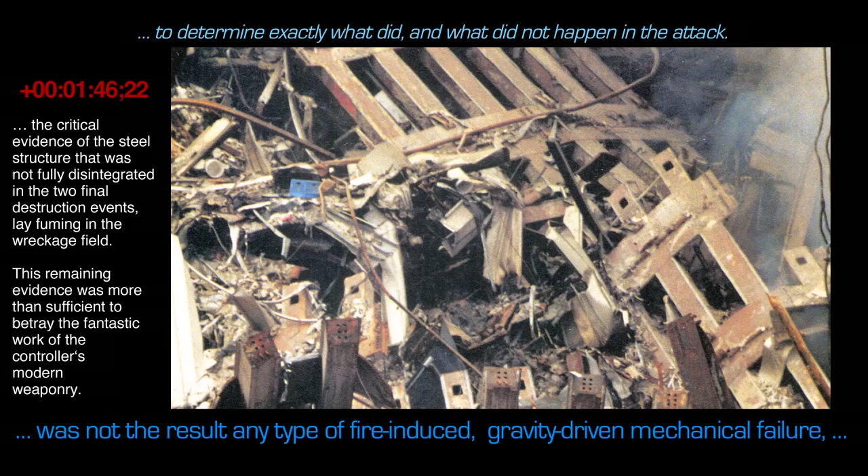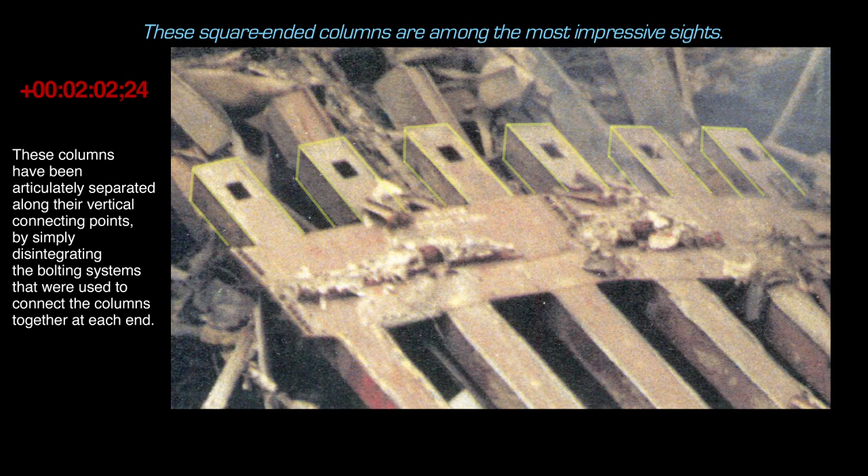It was the combination of the impact load doing great damage to the building, followed by the fire, that caused collapse.

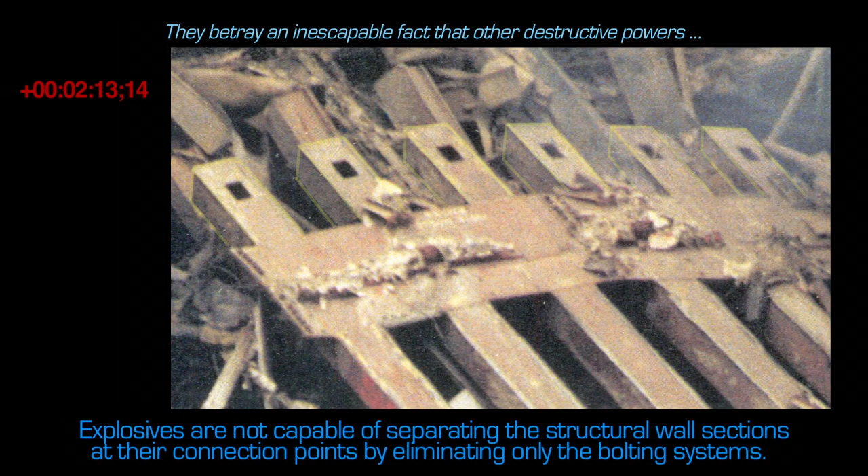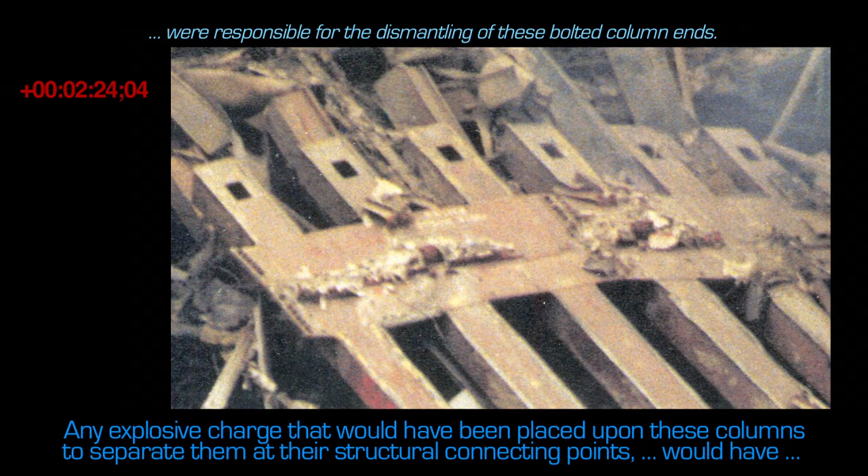What is clear is that this technology must be kept secret at all costs. And so you get this cover-up team saying, for people asking questions, oh, it was thermite, or it was bombs in the building—giving somebody someplace else to go so they quit asking questions.

One of my listeners is wondering, do they use thermite in regular controlled demolitions? It's not commonly used. RDX and HMX are typically used. These explosives have...

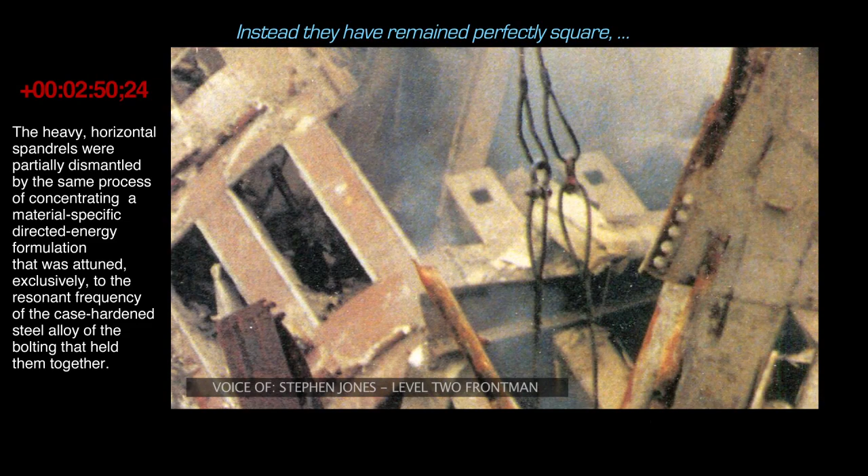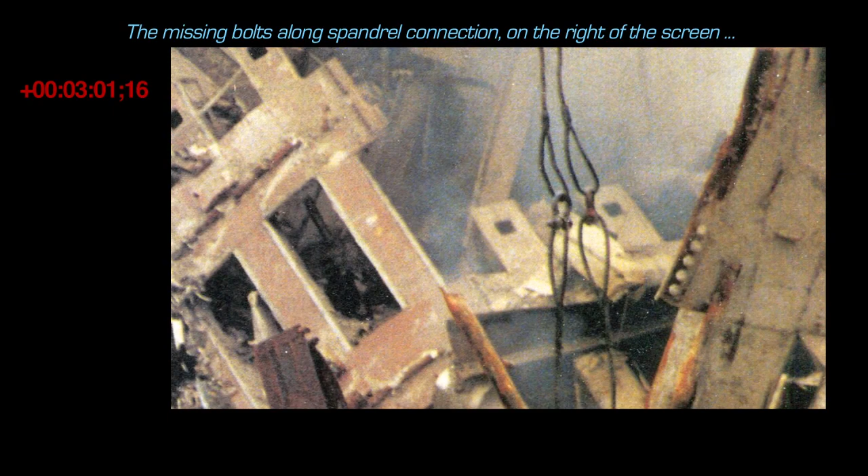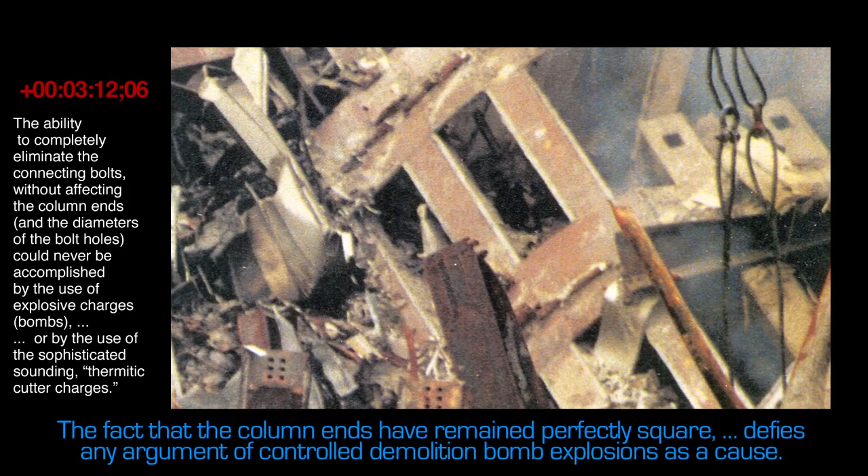Tags—chemicals that tell where the explosive was manufactured. The advantage of thermite is you don't have those tags, but in ordinary demolitions, where you're doing things legally, you don't worry about taggants. You don't care if somebody says, 'Oh, you bought your explosive at company X over here.'

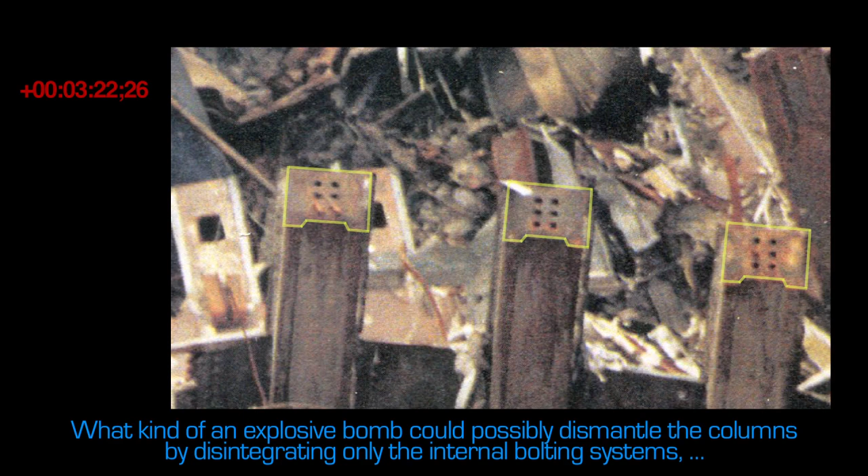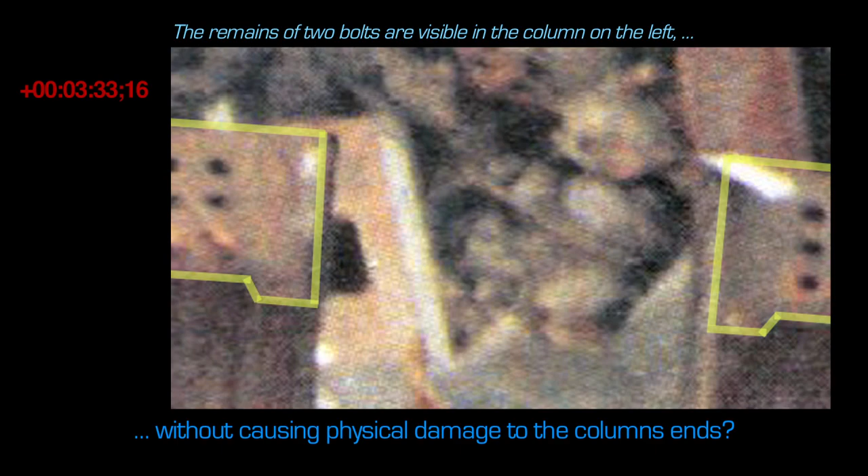Because with thermite in the World Trade Center buildings, someone might have been worried that there would be these tags in the explosive—using thermite gets away from that. It's a very common material, on the other hand, used for melting through steel, not for demolitions.

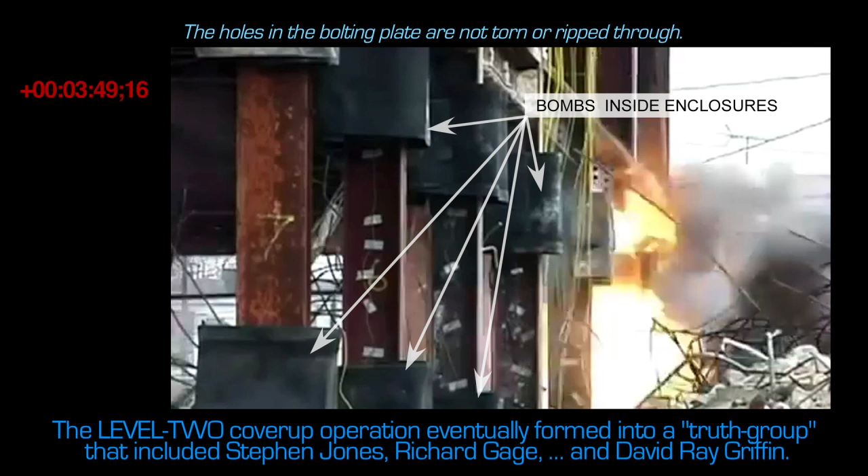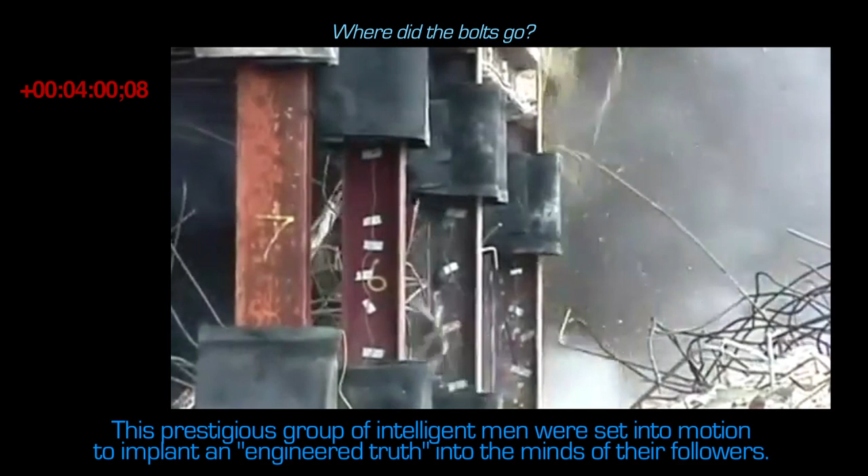Number 5: In controlled demolitions of steel frame buildings, explosives are used to slice the steel columns and beams into pieces. A representative from Controlled Demolition Inc. has said of RDX, one of the commonly used high explosives, that it slices steel like a razor blade through a tomato.

The steel is, moreover, not merely sliced, it is sliced into manageable lengths. As Controlled Demolition Inc. says in its publicity, our system segments steel components into pieces matching the lifting capacity of the available equipment.

Jim Hoffman, after studying various photos of the collapsed site, said that much of the steel seemed to be chopped up into sections that would be easily loaded onto the equipment that was cleaning up ground zero.

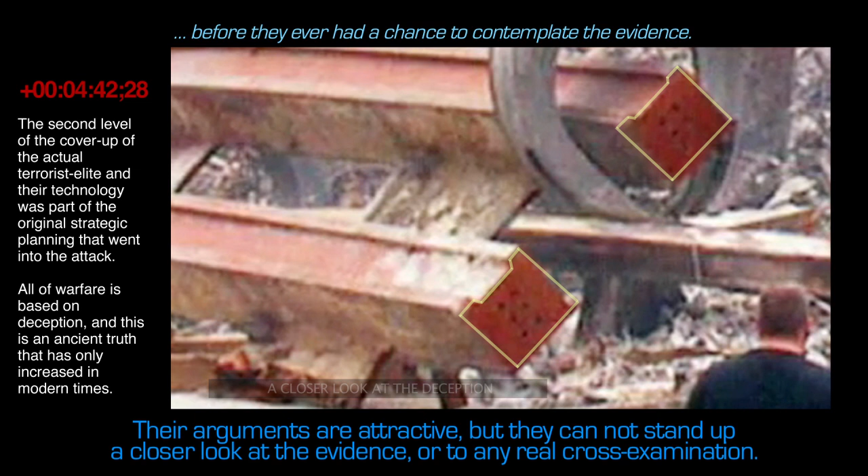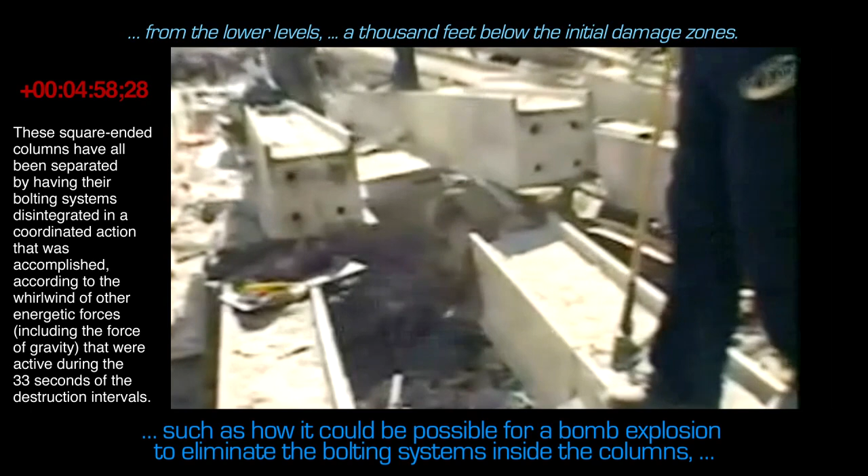So just from knowing that the towers came down, one would just naturally assume they were brought down by explosives, since that's the only way they've ever been brought down before.

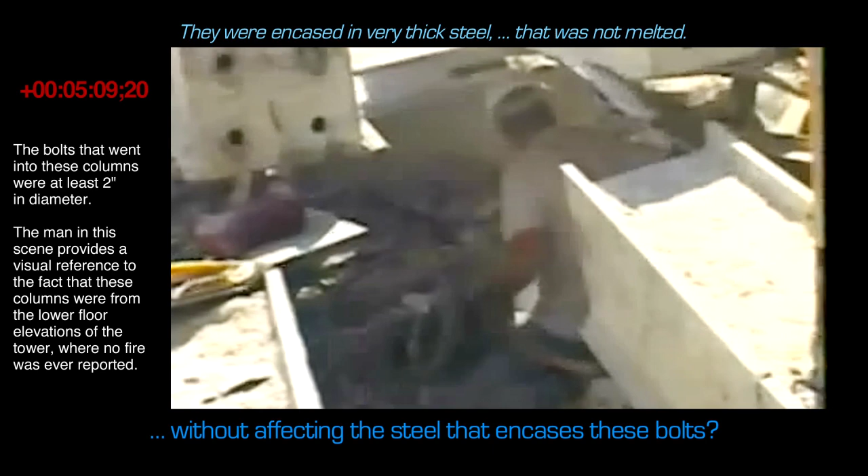The first engineering class that students take is statics. I'm like a drill sergeant, requiring them to give the problem statement: what you're given in the problem, what you're looking for, how you're going about solving it. So you first have to define the problem, and that is the step that gets skipped here.

Let's define the problem. What happened? The towers didn't burn up or slam to the ground, but turned into dust. We know that because of the lack of debris, but also, if they slammed to the ground, there'd be a seismic signal that would reflect that. That didn't happen—there was a small one, but nothing anywhere close to the size it should have been.

In Building 7, it was essentially a non-seismic event. A 47-story building crashes to the ground, and it isn't recorded on a seismic chart.

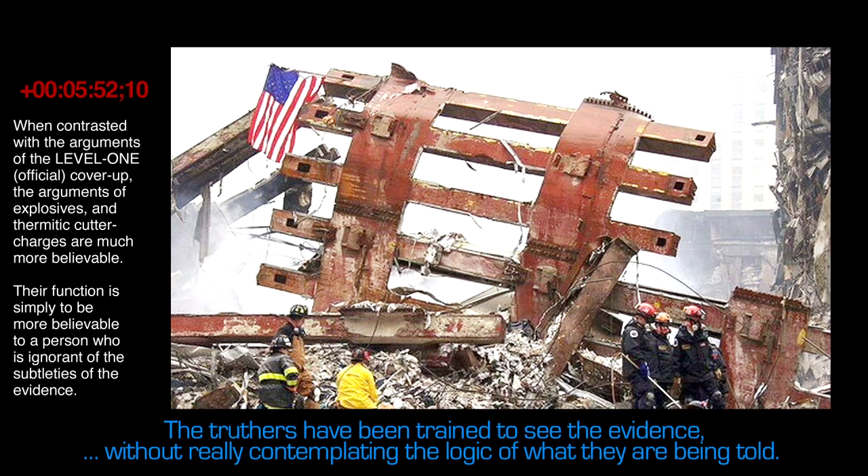After careful examination of the official explanation of the destruction of these three buildings, along with eyewitness testimony and forensic data that was omitted from the official reports, we, along with other professionals in the 9/11 Truth Movement, have concluded that a new independent investigation into these catastrophic events is both necessary and essential to the preservation of our democracy.

So they mean only that we should reject outrageous theories. But what is the difference between an outrageous theory and a non-outrageous theory? Well, this is one of the main questions in the philosophy of science.

When confronted by rival theories—let's say neo-Darwinian evolution and intelligent design—scientists and philosophers of science ask: which is the better theory, and why?

A good theory is one that will deal with all, or at least most, of the relevant facts in a coherent way, can explain them, and is not contradicted by any of the relevant facts. A bad theory is one that is contradicted by some of the relevant facts. An outrageous theory would be one that is contradicted by virtually all of the facts.

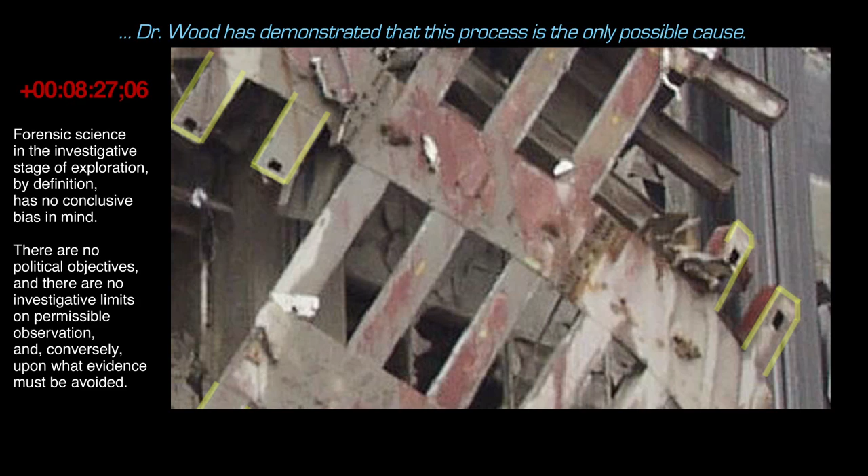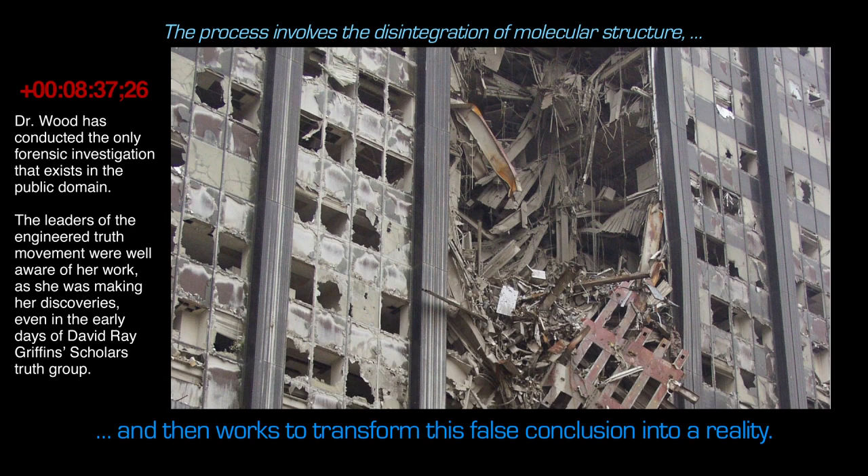Most of you know, over 99% of the steel was quickly shipped to Asia - this evidence from a crime scene - over the objection of many scientists and engineers.

She denies that there's evidence of explosions going off, and there are hundreds of witnesses, many of which are in the same DVD. She also cites that most of the steel is missing - a good percentage of it is missing. It's not missing, it's ejected laterally with explosive force, clocked by physicists at 60 miles an hour laterally. These perimeter steel, structural steel sections, landed 600 feet away. So this steel is not in its footprint. We agree about that.

My argument is it needs to be investigated. There is another hypothesis here, staring us in the face, of explosive demolition. You have the hypothesis of fire, but the official reports don't analyze this other possibility of explosive demolition. That is strange - scientifically, I say it's a viable hypothesis. They look at just the one, and I'm saying good science requires us to consider other hypotheses, in particular the explosive demolition hypothesis. Let's study it out, let's debate it scientifically, let's put it on the table, for heaven's sakes.

There's a lot at stake here to understand what caused the collapse of these buildings. We should be able to discuss it dispassionately as scientists. It's hard to do, but we should be able to do that.

Yeah, that's true - it certainly takes time to put these explosives in. We've learned quite a lot. I've just found it fascinating to learn about how controlled demolition is done. They hook these explosives - that could be super thermite, a form of thermite that is explosive, using nano aluminum, ultra-fine aluminum. Typically you'll set the charges on the steel columns at an angle so as to cut through or melt through, depending on the form of thermite used.

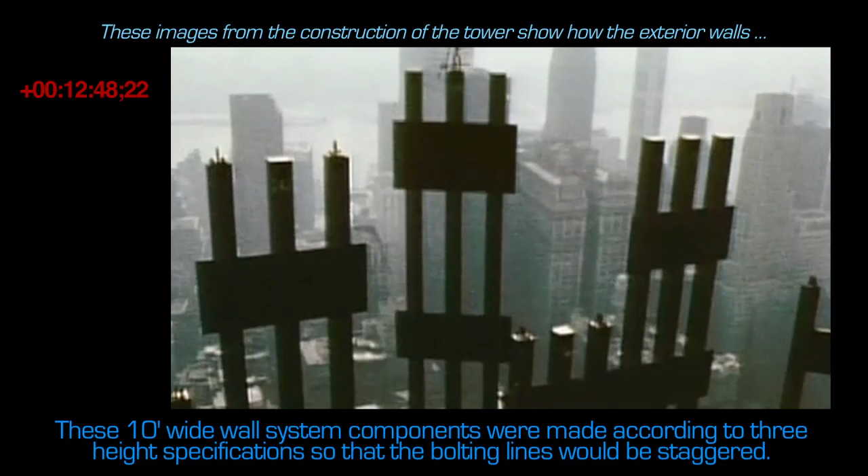Final plans call for a complex of low-level buildings surrounding two 1,350-foot towers, the tallest ever built. Their great height was made possible by the use of load-bearing walls. Extremely tall buildings were traditionally inefficient, since huge amounts of interior space were taken up by structural supports and elevators. The Trade Center towers would overcome this problem. The exterior walls were designed to bear much of the weight of the towers, as well as all of the wind loads. Only internal supports would be in a central core of columns. Elevators would be placed in the shafts formed by the core columns.

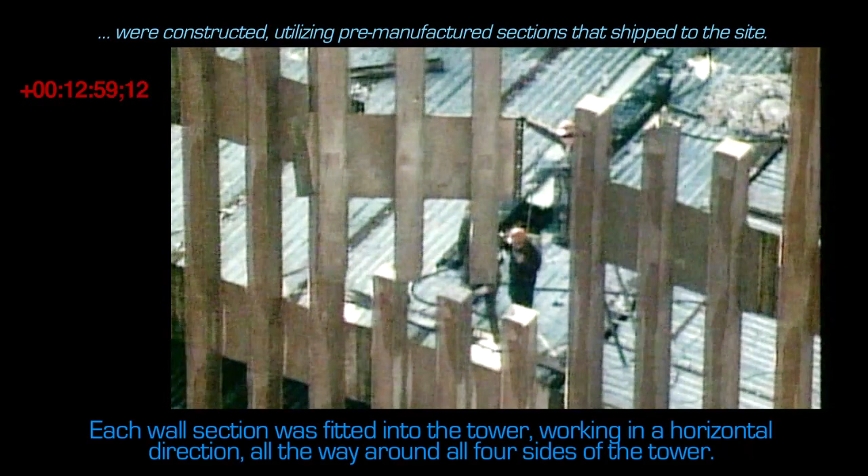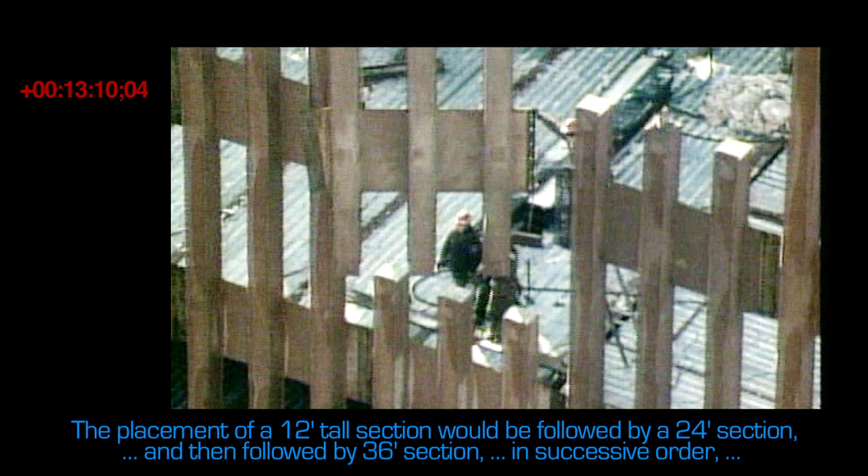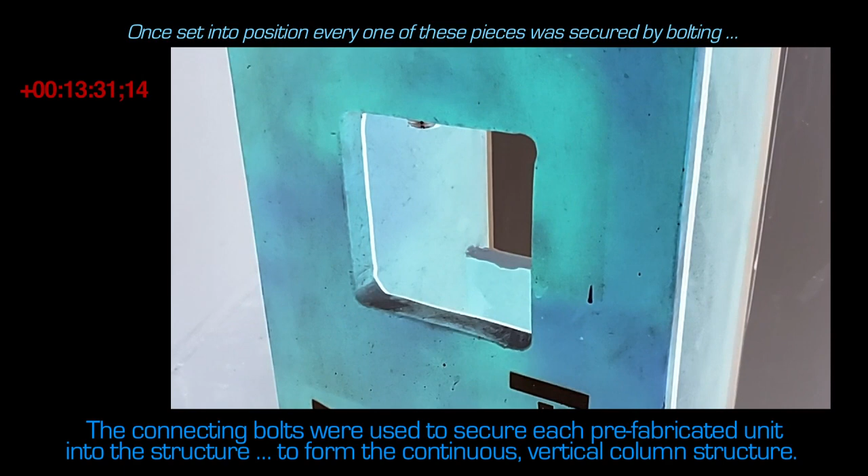Meanwhile, orders were placed for the 200,000 tons of steel which would be needed for construction. Individual pieces were prefabricated and rarely interchangeable. Moreover, there would be no room to stockpile materials at the construction site. This created a tremendous logistical problem - steel sections would have to arrive at the site in the exact order and at the exact time needed. To meet this challenge, Port Authority engineers used a computerized system known as Critical Path Method, or CPM. CPM would coordinate every aspect of construction, track the flow of materials, and minimize any delays.

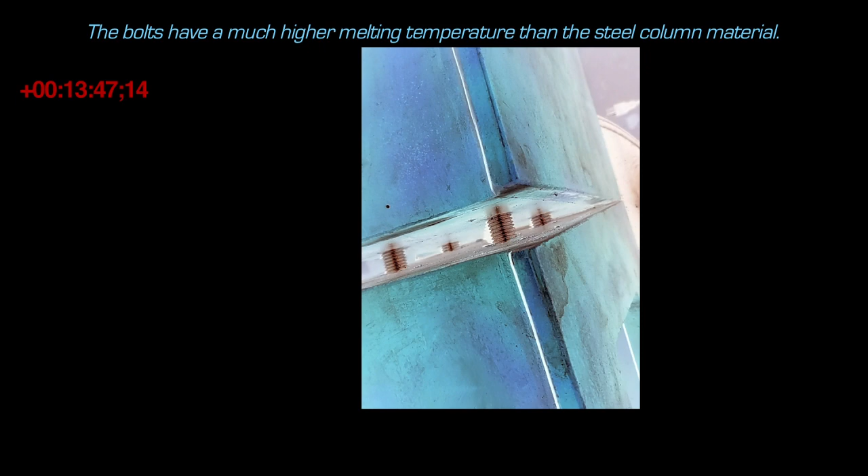But after you've collected all of this data, then you start seeing what the destructive mechanism is.

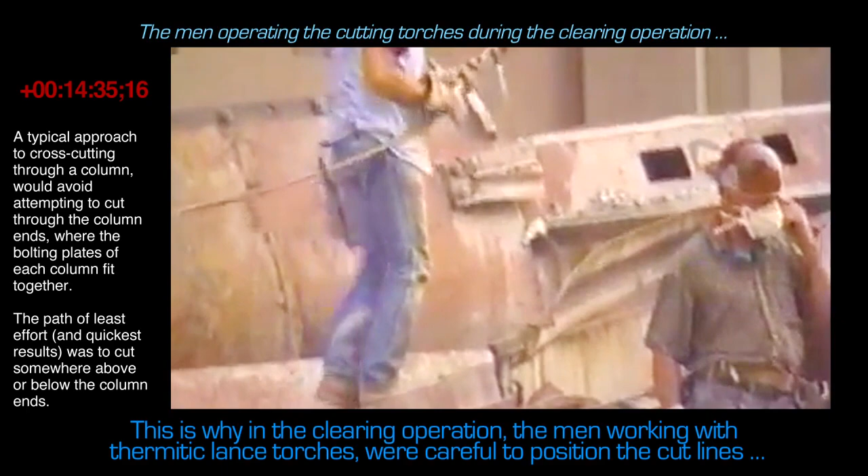What could you speculate about this? I don't speculate. Yeah, that's the key. You have to have discipline to not speculate, because what does speculation do? It gets you nowhere. I like to say, know what it is that you know that you know, and know that everything else you don't know. Don't fill in that gap with guesses and assumptions and speculation, because that doesn't bring you an answer. You don't take someone to court on speculation.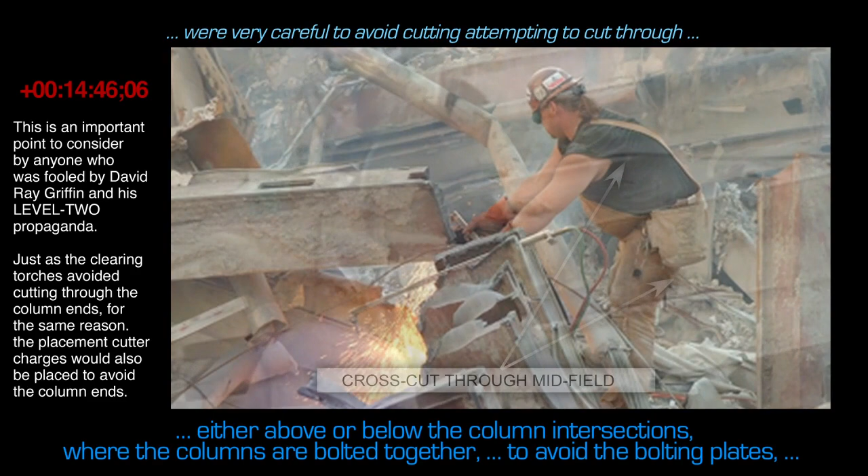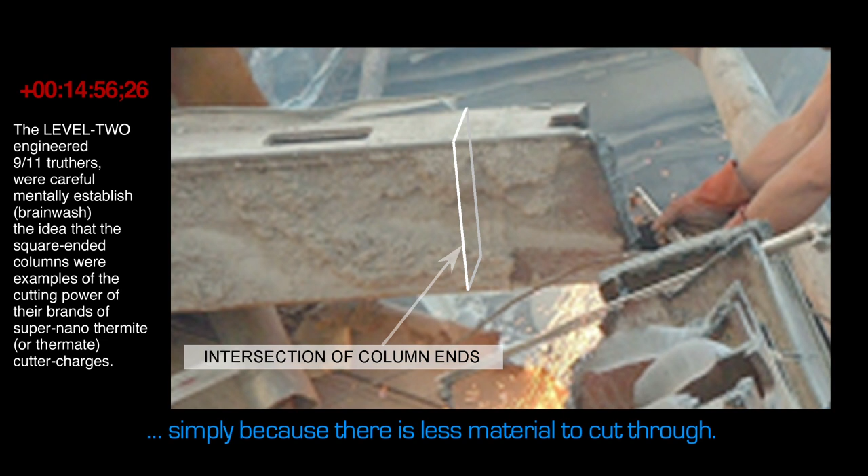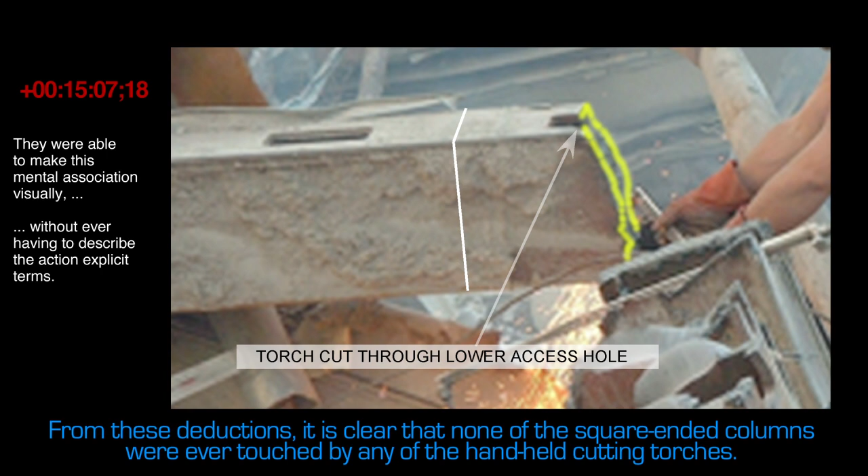So, as I like to say, you keep looking at the evidence, and it'll tell you what happened. You look at it long enough.

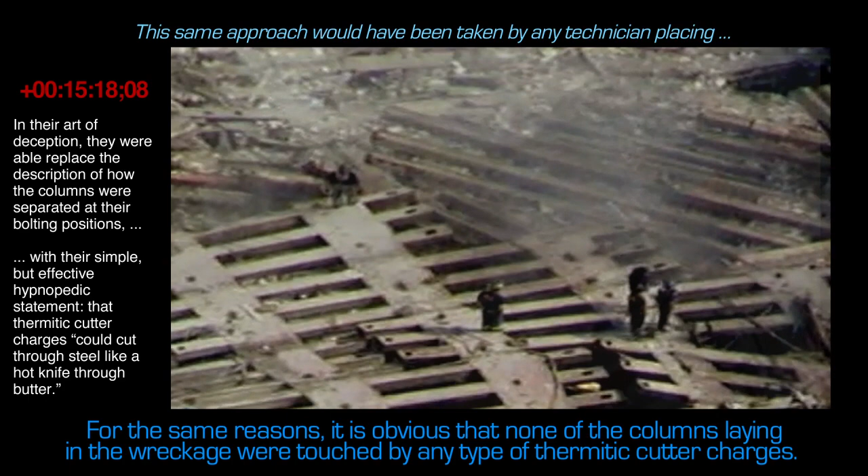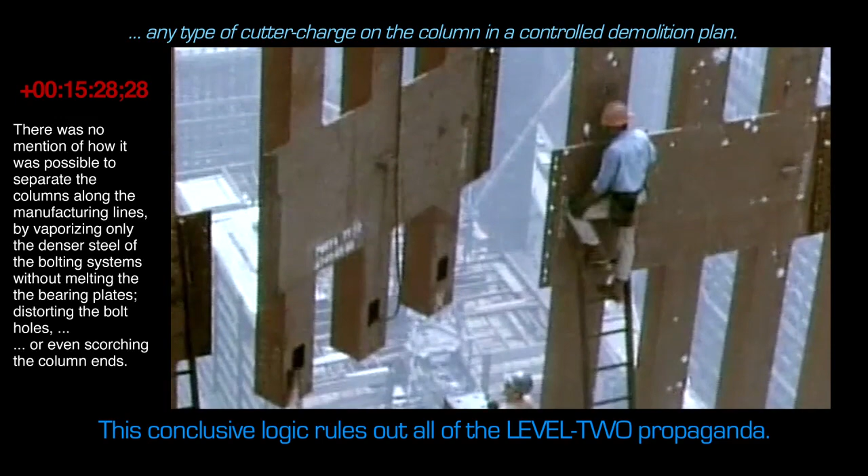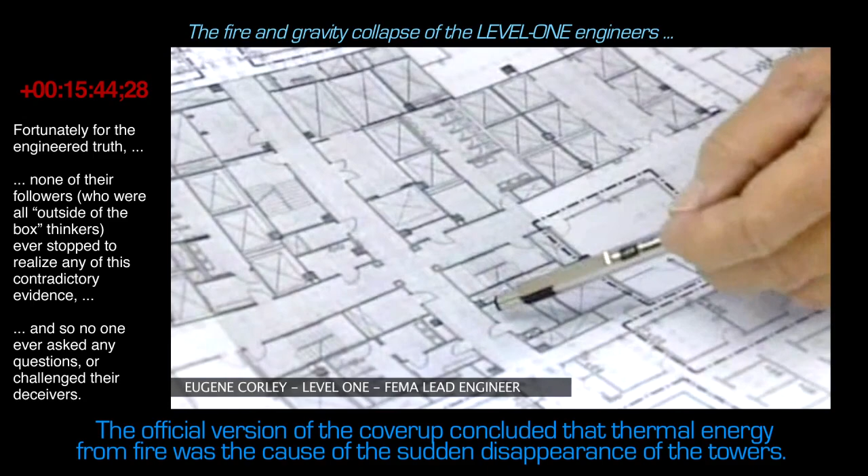But structural damage is not all the building must withstand. Of the 10,000 gallons of jet fuel aboard the aircraft, as many as 3,000 gallons ignite and are consumed within 2 seconds. 4,000 gallons disperse as a fiery vapor cloud. Those floors are immediately set on fire, all of the carpets, the furniture, any combustible inside the building.

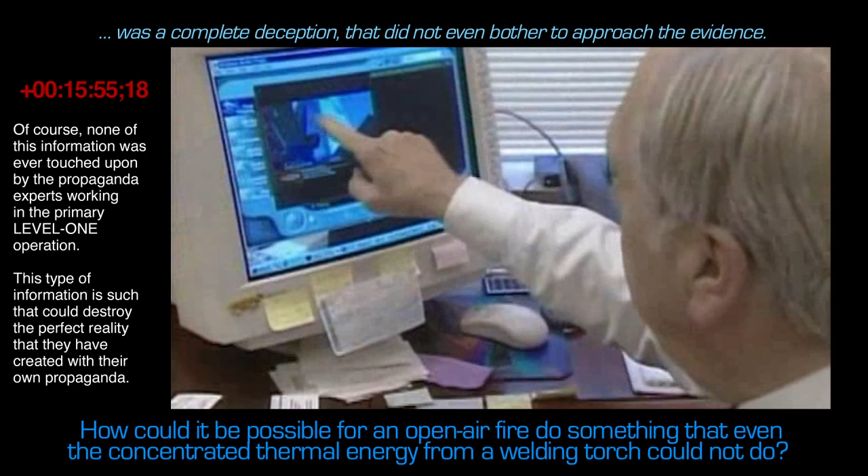And an engineering autopsy must seek the truth about how and why the buildings fell, as things are changing under us as we're going down.

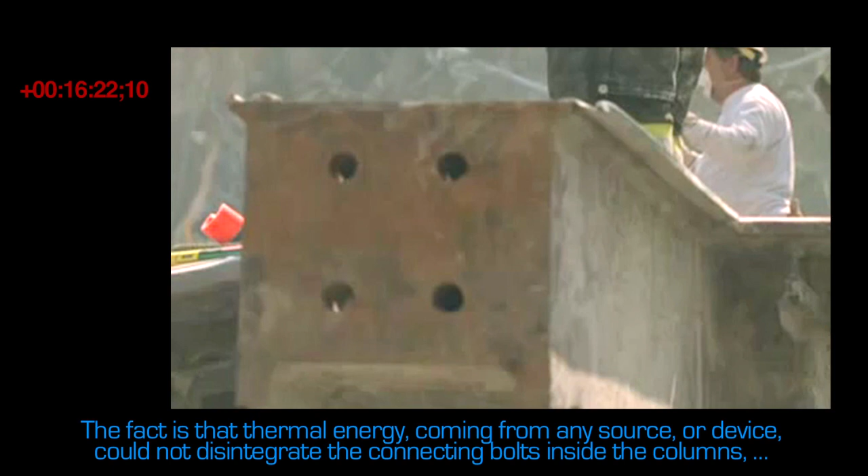The collapse of the 110-story towers left a chaotic jumble of material that still burned from the jet fuel fires. The fire is burning from the bottom because you have so many million square feet of office space in those towers. What kind of combustibles are in 1 million square feet of office space? The paper, the furniture, the carpets. The fires got very intense down there and actually melted beams, where it was molten steel that was being dug out.

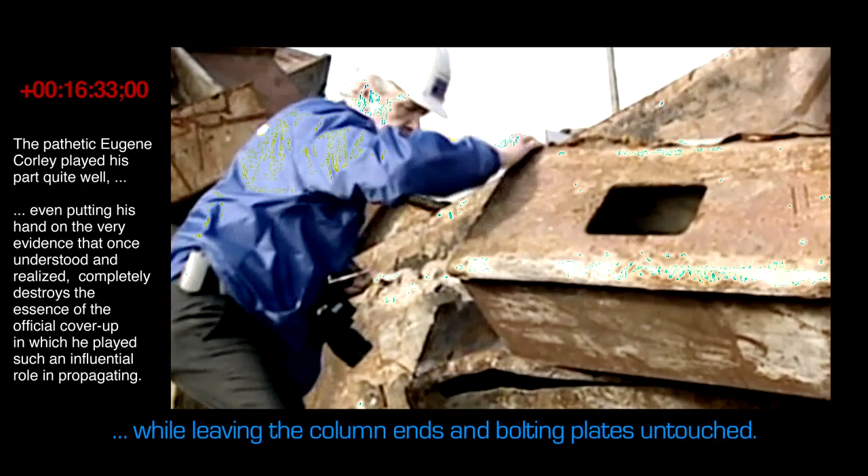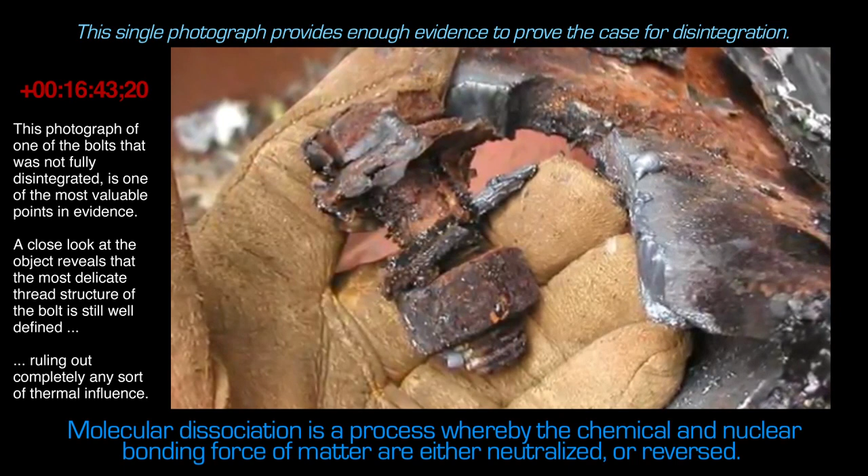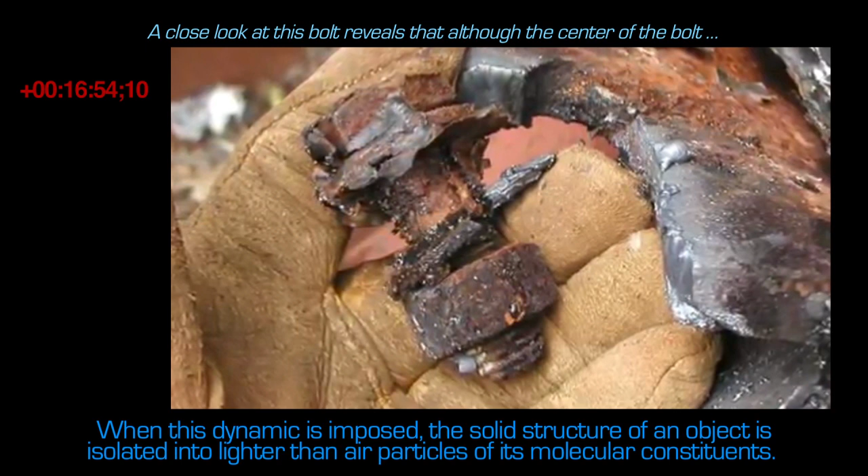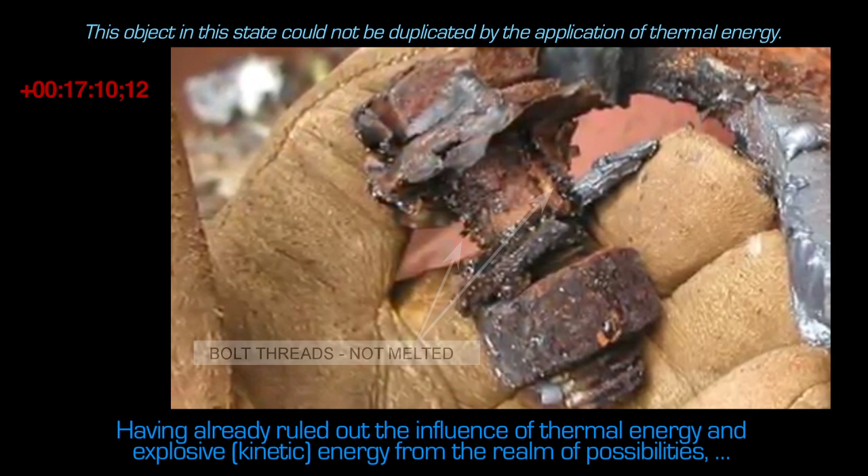So you're showing a tremendous discipline by sticking to 9/11 and not moving off of it to other areas. I see other areas, but if you look at one thing in great detail, 9/11 is so significant. It's got everything in it. 9/11 was an attack on human consciousness. People lost the ability to think after that, it seems. Imagine that they see buildings turning to dust in front of them on TV, and they're told it collapsed. Okay, they collapsed. Huh? You know, imagine that.

Here's a quote that I've incorporated: In God we trust, all others must bring evidence.

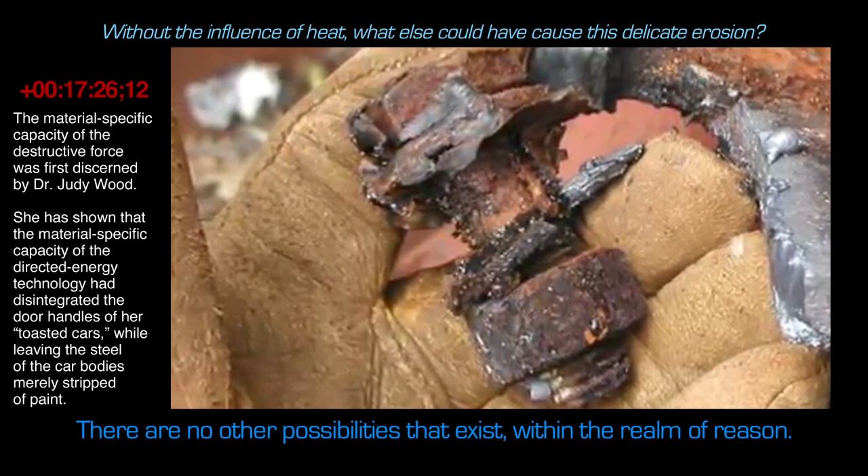9/11 was an attack on human consciousness and a type of brainwashing. Until you get rid of that brainwashing, people's brains are shut down. In order to understand the material, you have to be deprogrammed to some extent to be able to see it. Otherwise, you just jump to the answer. You're arguing about your opinion about the answer without understanding how to look at things.

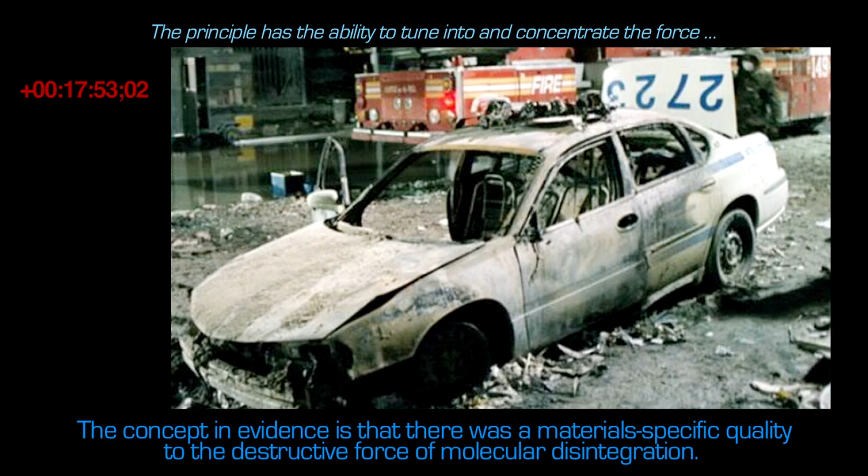There was pieces of their desks and pieces of the photos on their desks and their Rolodexes. The most powerful artifacts are the ones that symbolize the thousands of lives lost. One day, one of these items may be the single symbol by which future generations remember and come to understand the terrorist attacks.

They actually found my ID from the World Trade Center, from the 72nd floor where my office was, and they just got it to me today. This is a World Trade Center ID that I had at my desk. This had my name on it, so they were actually able to identify Peter Rinaldi, Port Authority of New York and New Jersey, and get it back to me.

All I remember was the silence of the scene. It was extremely silent. I thought what I expected to see was nothing like what I actually did see at the time of my arrival at the site. There wasn't much that you could say, you could describe. Everything was dust and metal.